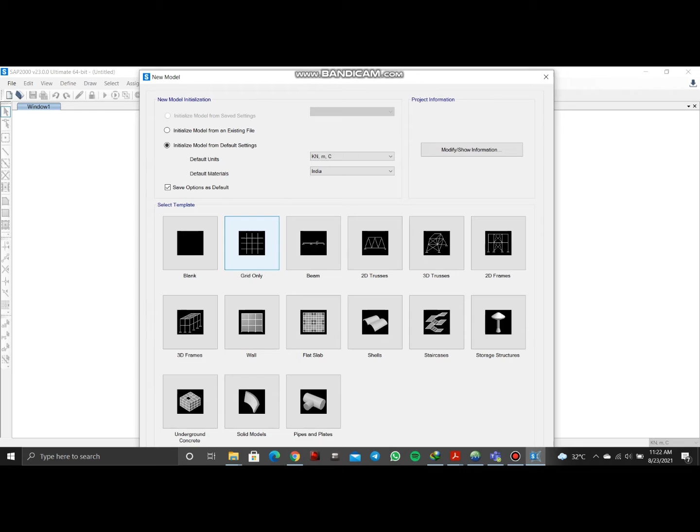I select grid only. Here we can choose number of grid lines in the Y direction and any other direction.

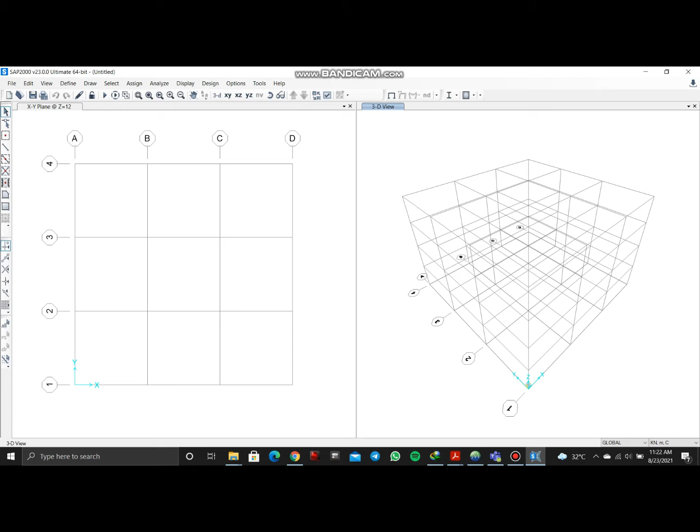There are two grid views. This one is for 2D view, another one is for 3D view. Here we can select XY view, XZ, and YZ. Normally we use this grid view for 3D view, but also we can use this as another 2D view. Like here we can see XY plane, here we can see XZ.

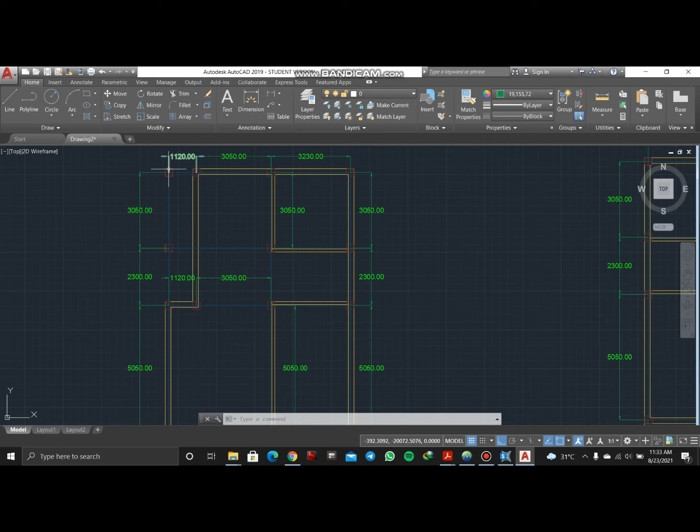So we have to select grid lines 4 from A, B, C, and D in X direction, and again we have to select 1, 2, 3, and 4 grid lines in the Y direction.

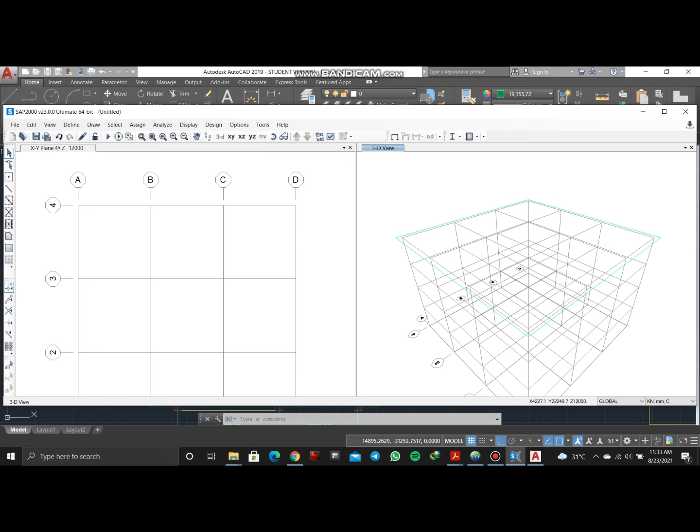So let's enter it in SAP 2000. Double click on the grid point, X direction. This is the center to center distance for 4170.

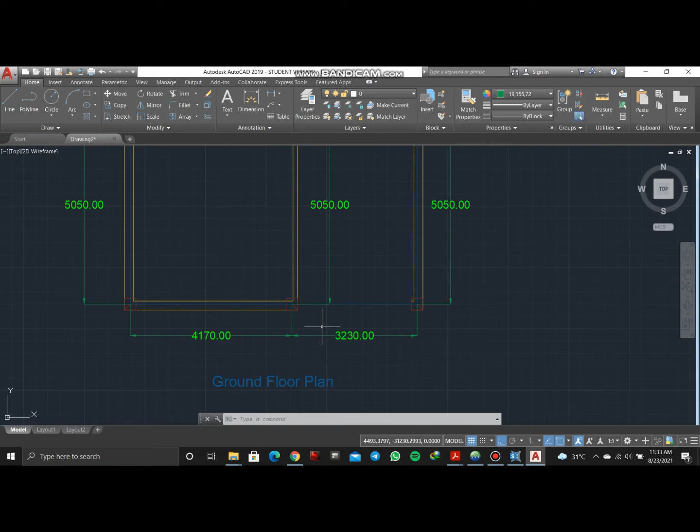Basic grid line is this one. We have to take 1120 as the first one.

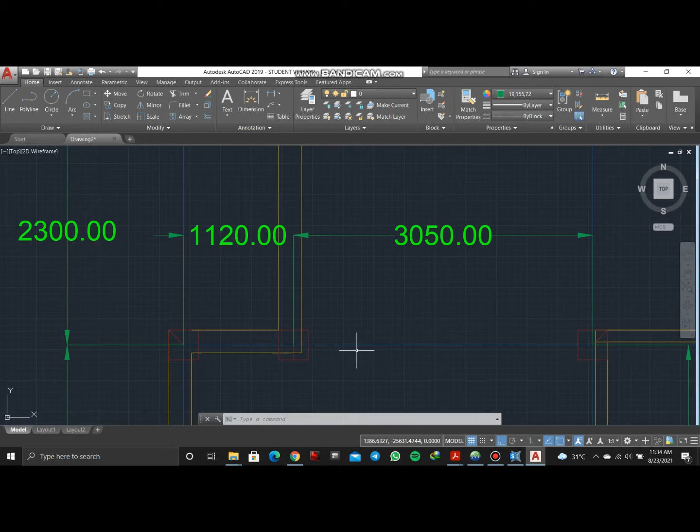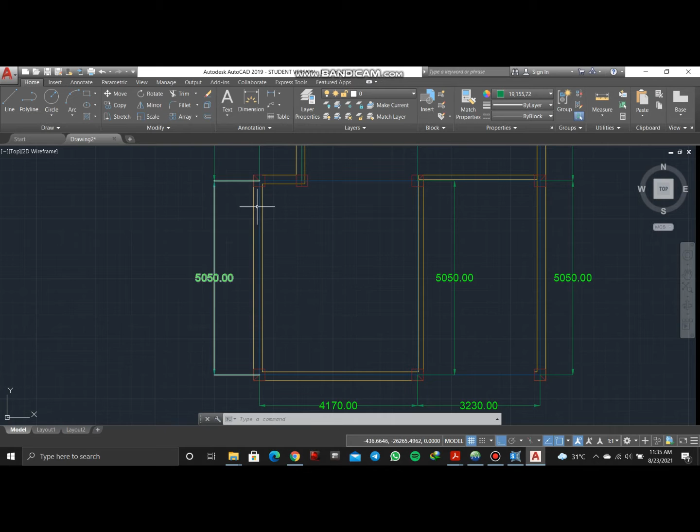So now Y grid data. This second grid line is from 5050 millimeters.

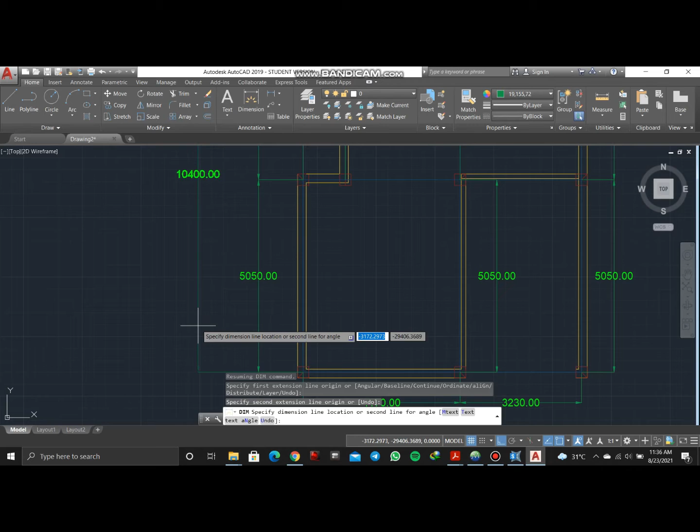Here in Z direction, the dimensions are selected from the floor to the surface of the upper floor. It is 2750.

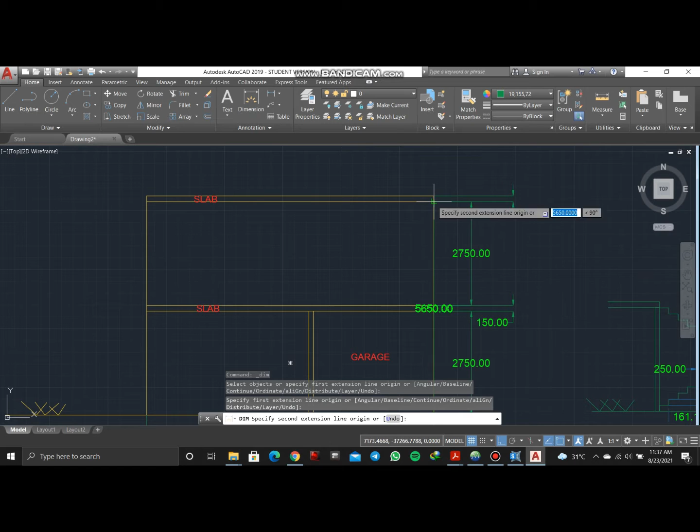We don't need these two grid lines, so we can delete them. Delete. So now we have defined the grid lines. So let's okay.

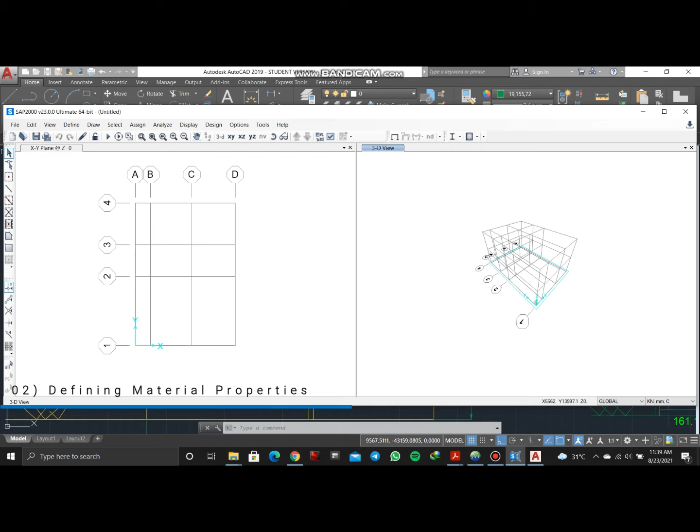Now we have to define the material properties. So we go define materials, and here we can select materials. So if you want, we can add new materials. Region India, standard India. Here I select M20 grade concrete.

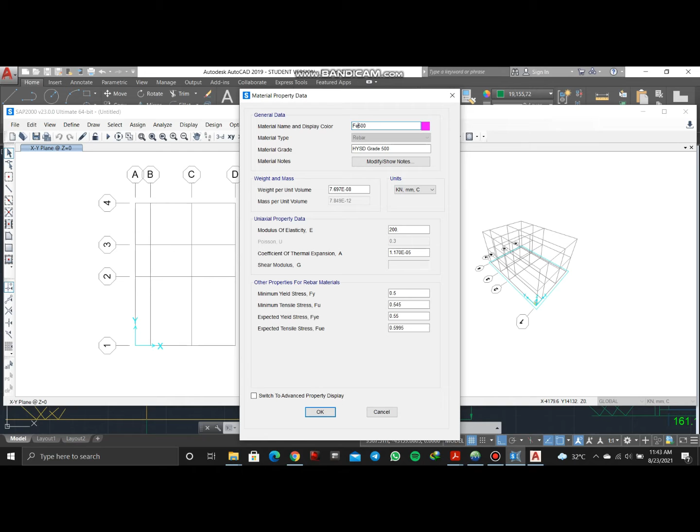Yeah, everything is okay. Now we have to define rebars. Here I select rebar Fe500. Okay, and let's modify it. Now it's Fe500. Okay.

Next we have to define section properties. For that we go to section properties. Here we can select define frame, tendon, cable, and area sections. First I am going to define a beam.

Here we select concrete, then rectangle. We rename this as beam, and the dimensions are selected for beam. This depth is 300 millimeter, and width is 230.

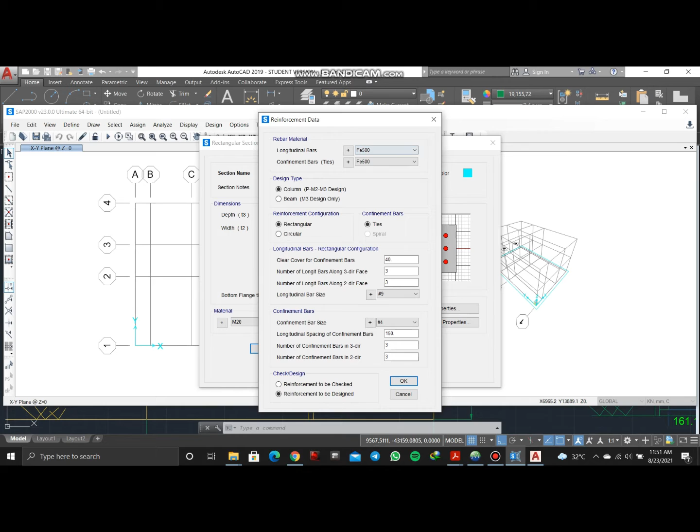The material selected is M20 for concrete, reinforcement material is Fe500. We have to select beam. Concrete cover I selected is, sorry, 25 mm in both sides. Okay.

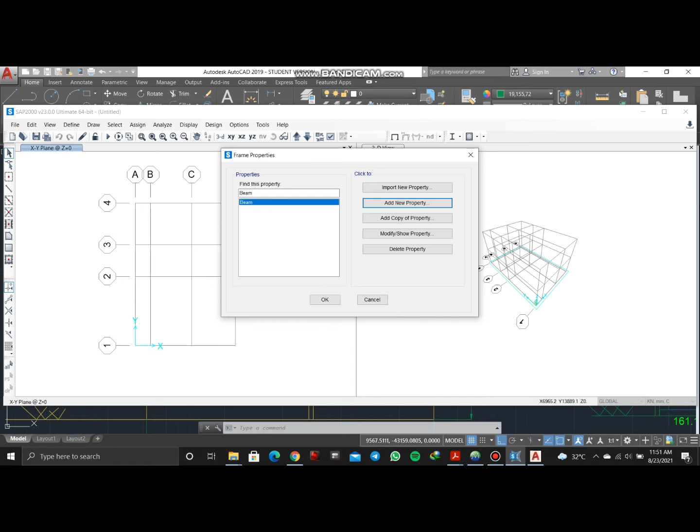Next, I'm going to define column. Dimension of the column is 300 into 300. Material I have selected is M20.

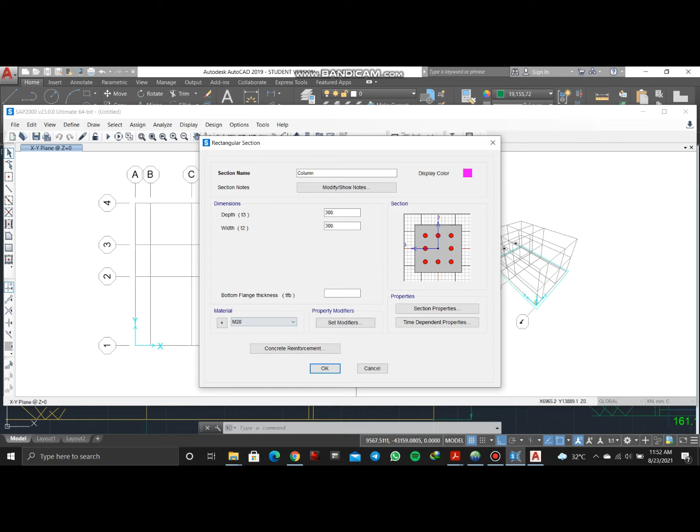Now we define slab. Here I got to define section properties in area sections. Here I add new section, slab. The slab is 150 mm. Material selected is M20. Okay.

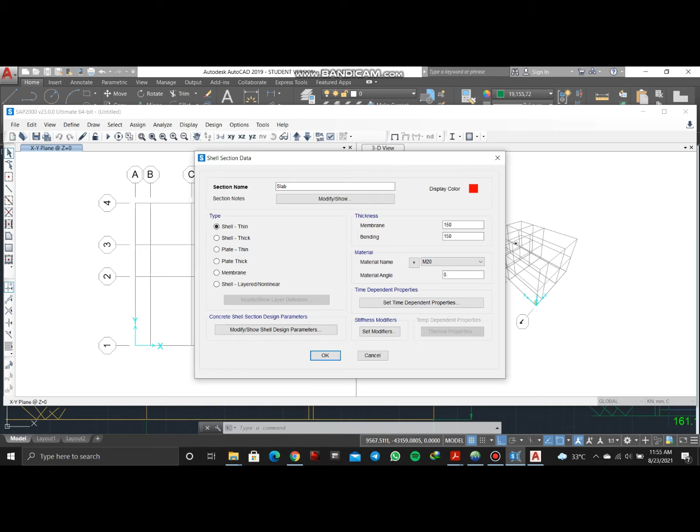Now all section properties are defined. So next we have to draw the building.

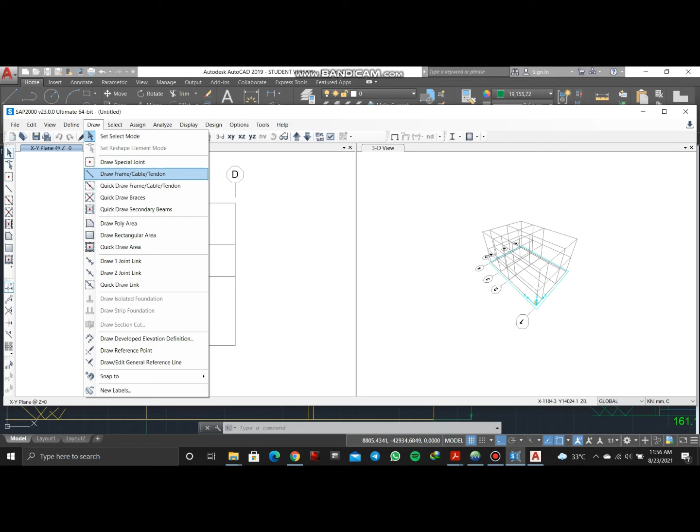Now we can model the building. I select draw frame, cable, and tendon. Here this is the XY plane. You can see in this floor there are no columns running.

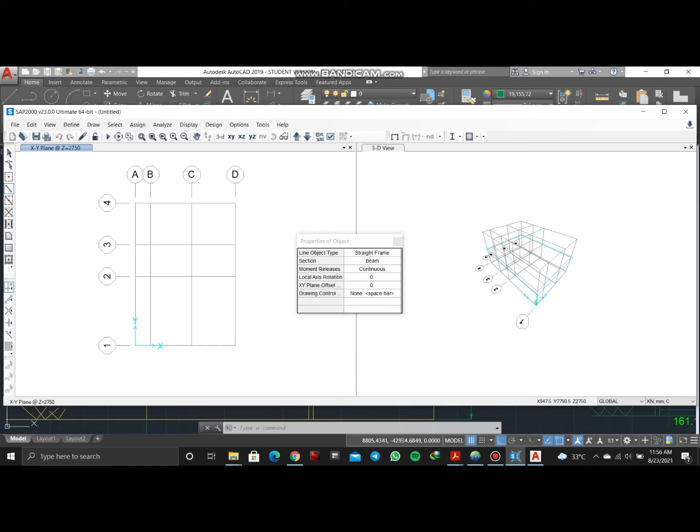So we go to the first floor. We select beam. Likewise, we have to draw beams for the second floor also.

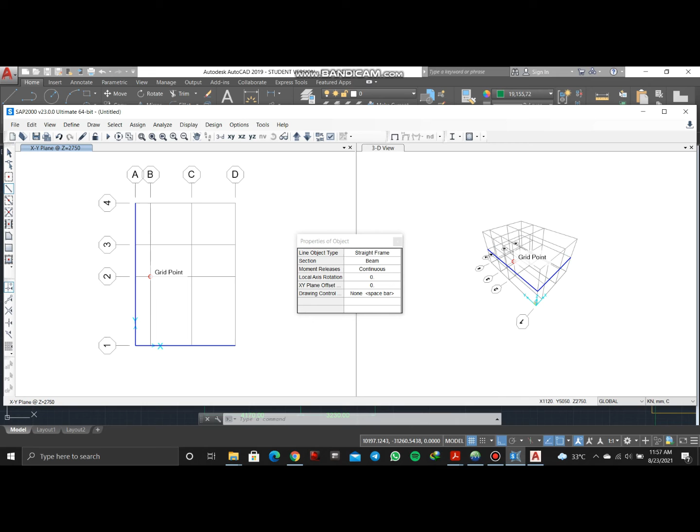I have selected the XZ plane, so now we can draw columns.

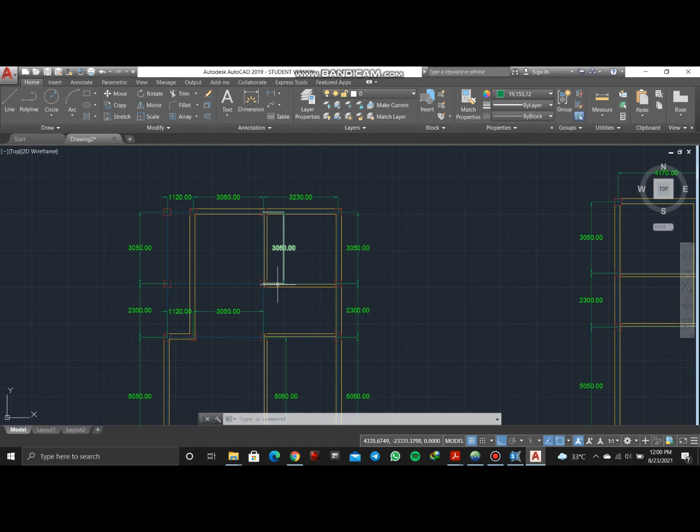In this ground floor plan, there are one, two, three columns here. In the first grid, then one, two, three, four grids are in the second grid, and again three in the third grid, four in the fourth grid. Let's draw.

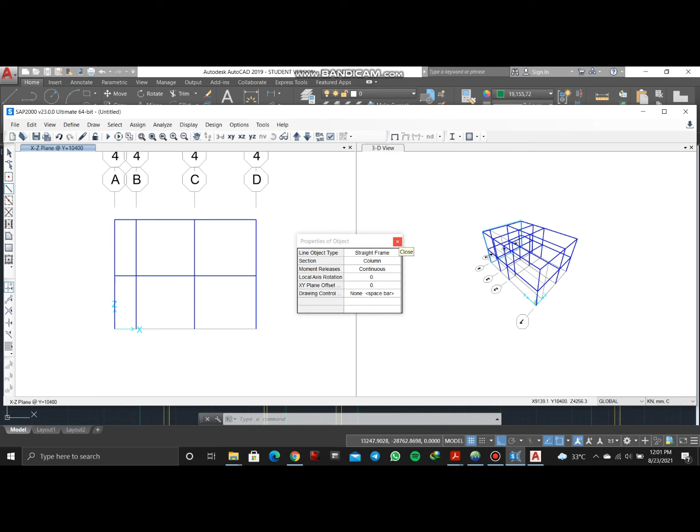Now I have completed drawing columns and beams. Now what's left is to draw the slab. I go for the XY plane. Here you can select one of these to draw slabs. Since all of these are rectangular slabs, I select the rectangle area option, and select slab.

Now we are in the first floor. Here in the first floor, there are one, two, three, four, and five slabs.

First floor slab is completed. Now let's go to the second floor. The second floor is completely covered in slabs.

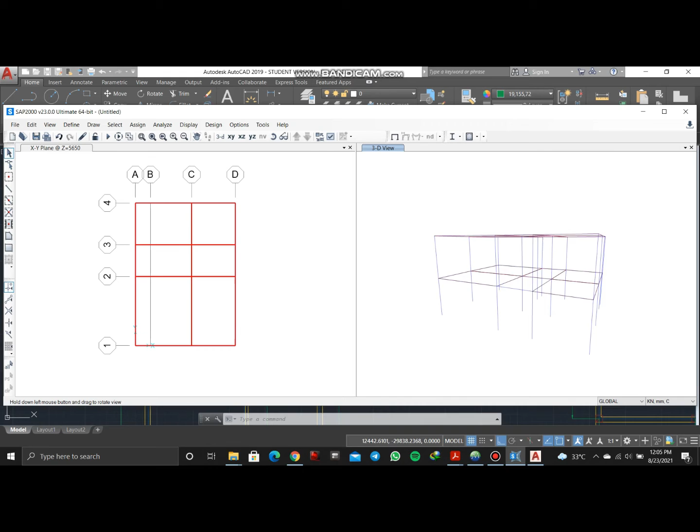After modeling, we have to fix this structure to the ground. First, we have to go to the ground floor, then select all. Then we go to assign, joint, restraints. Then we select fixed. Now the building is fixed to the ground.

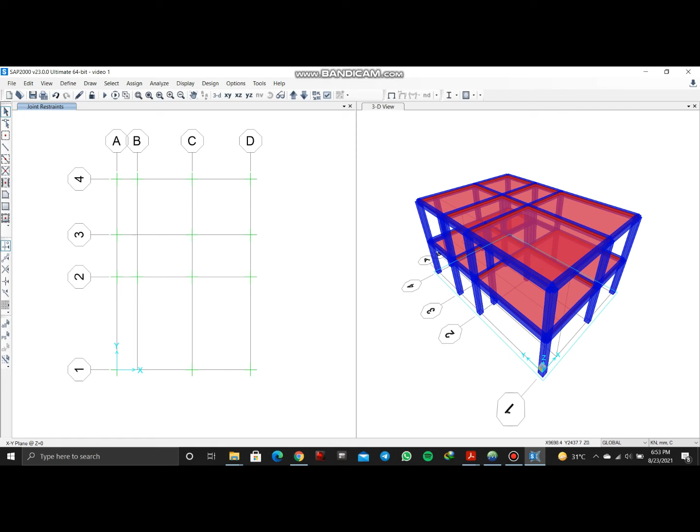After that, we have to define the loads. So we go to define load patterns. Here, dead load is already defined, and the self weight multiplier is one, which means the software is automatically calculating the dead load.

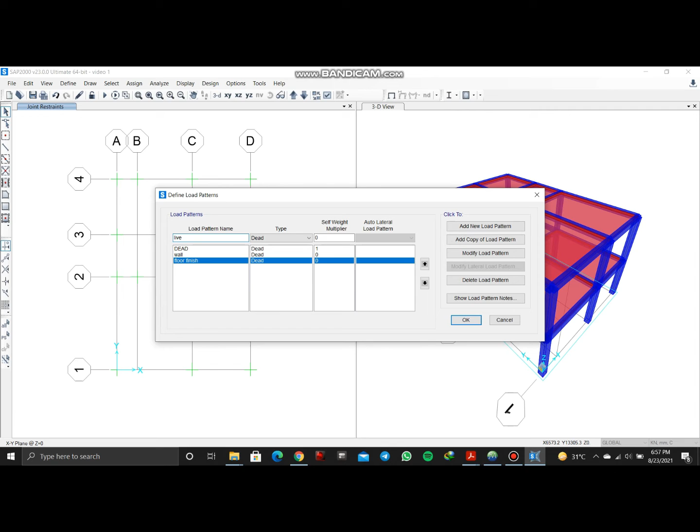We have to define the other loads which we apply manually. So wall load is type dead, with multiplier 0, meaning we have to apply it manually. Live load, this type is also live.

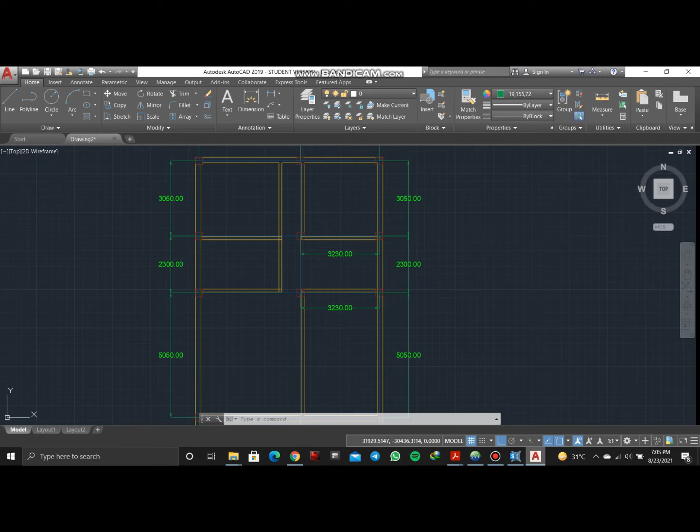Only in this beam there's no wall running. So we assign frame loads distributed, and here we can add the wall load. It's wall load, and load direction gravity.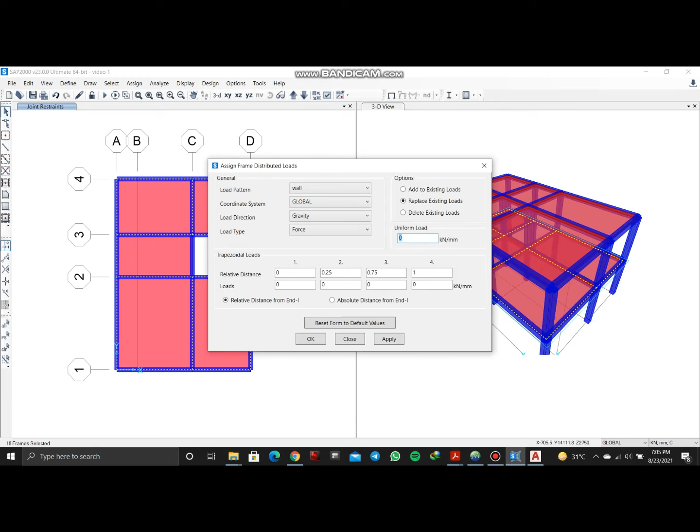Now we have the uniform load. Here we select unit weight of brick as 19.2, wall thickness as 0.23, and 2.75 is the height of the brick wall. So the input load equals 12.144 kilonewton per meter.

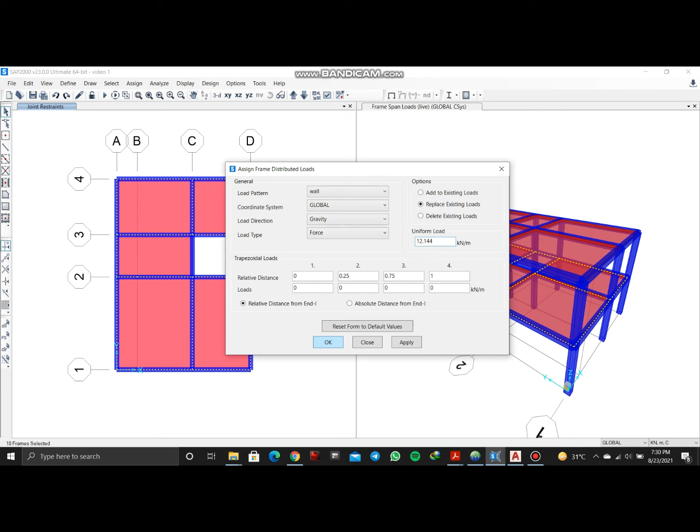By selecting display, object load assigns, frame, we select wall. Now it shows the applied wall load in the structure.

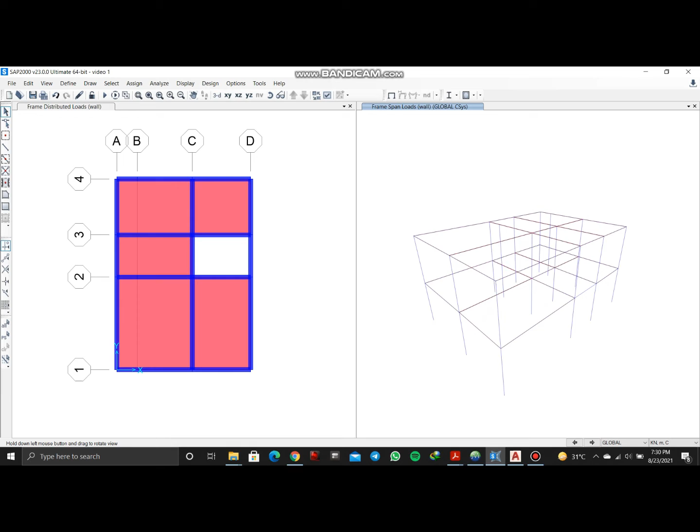Now we have to apply the floor finish. For that we select all the slabs in this structure. If we go to select, there are various section properties, so here slab is here, and we select slab. Now all slabs are selected.

Then go to assign, area loads, uniform shell. Now we select floor finish, global, which is the uniform load here, and it's 1 kilonewton per meter square.

Now we have to add the partition load. So we go to previous selection, except the roof slab. All the other slabs are applied with the partition load.

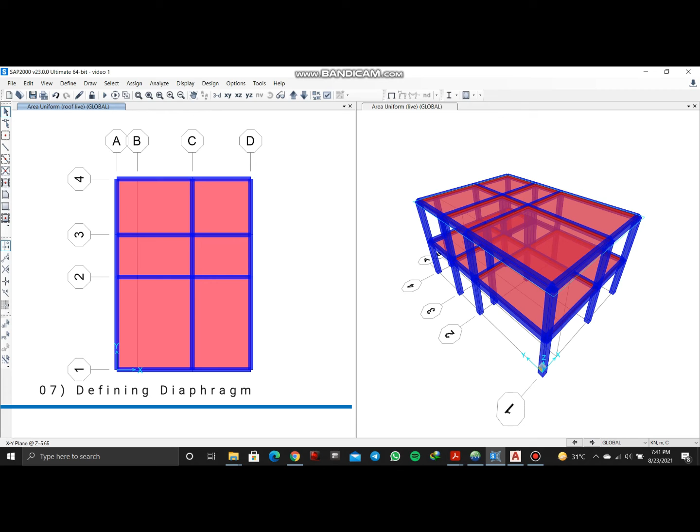Now all these slabs, beams and columns have to coordinate accordingly, so we have to fix them. Next we have to define the diaphragm.

First we select this slab, this whole floor. Then we go to assign, joint constraints. Here define joint constraints, this is a diaphragm, this is diaphragm one.

There are two floors, so select it. We add another diaphragm two. So this one is diaphragm two. Apply.

Then we go to the first floor, select everything on that floor, and click on type one. Then apply. Now we have to define mass source.

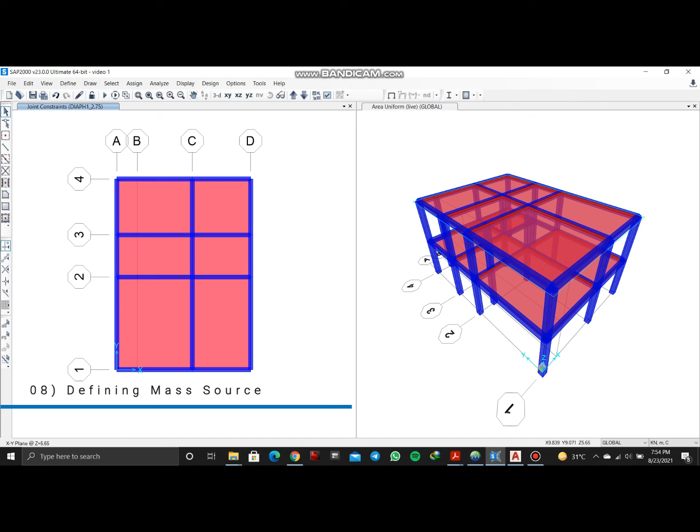For that we go to define mass source, add new mass source. Here we select specified load patterns only, with dead load one.

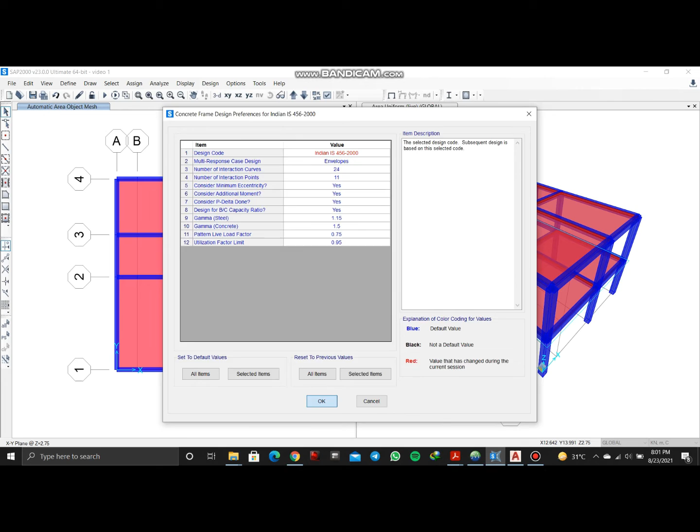Now we have to define load combinations. We go to define load combinations, click add default design combos, and select concrete frame design.

Here there are 13 combinations. The first one we ignore, from second one onwards there are 13. For each and every one we are going to rename them because we have to apply these loads, so first we have to define and rename them like this.

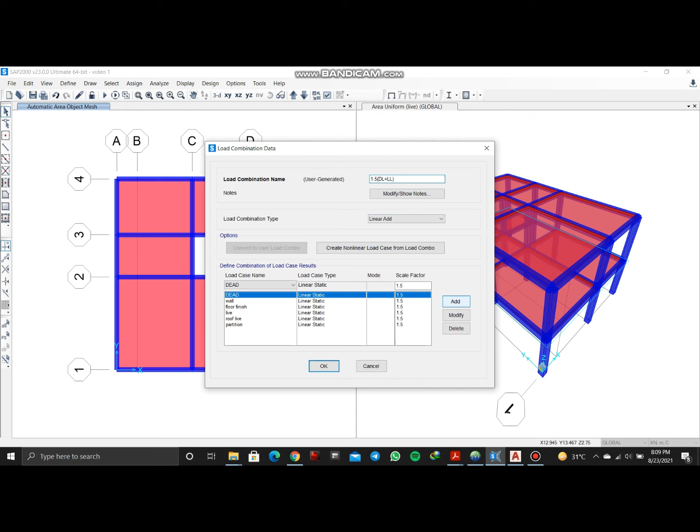Here the scale factor is 1.5. So we rename this like this, and we rename all of them. Now we have completed defining load combinations.

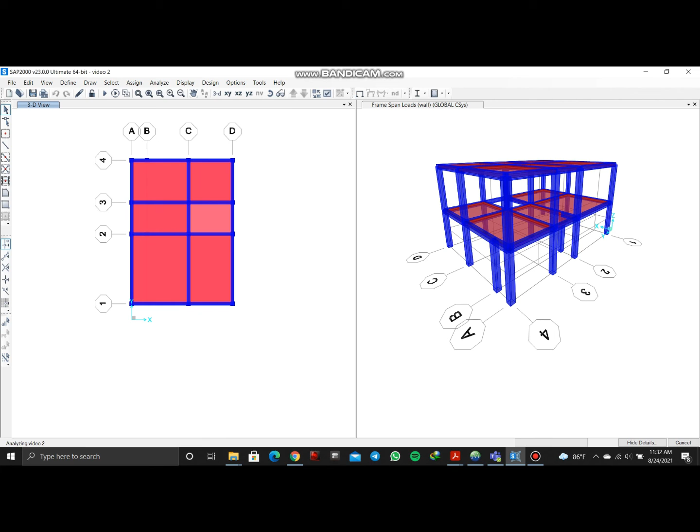Now we have to analyze the structure. So we can press this button, run analysis, and now it will show the deformed shape. Here we can click start animation.

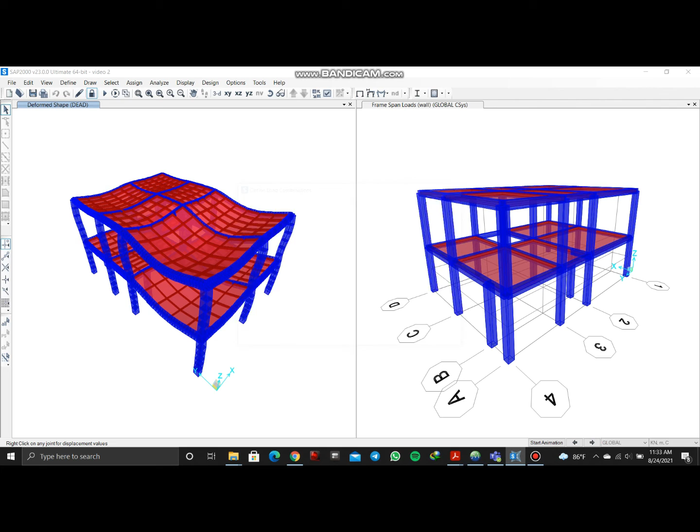There are various types of loads acting on this structure. So to know the shear force diagram and moment diagram, first we have to define the load combination. We go to define load combinations, where we have to take a combination of all these loads. So we go to add new combo.

Here we select envelope, we type envelope, and we select envelope here. Then we have to add these loads one by one, and select this one. Combination add.

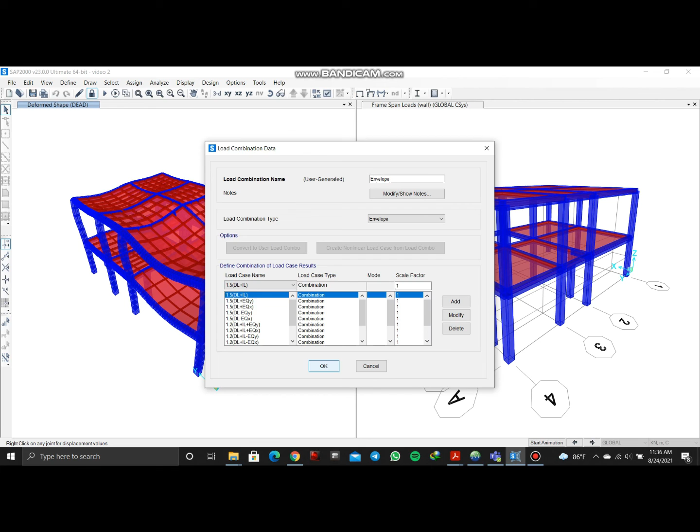Next we have to see the shear diagrams and moment diagrams. So we go here, start design check of structure.

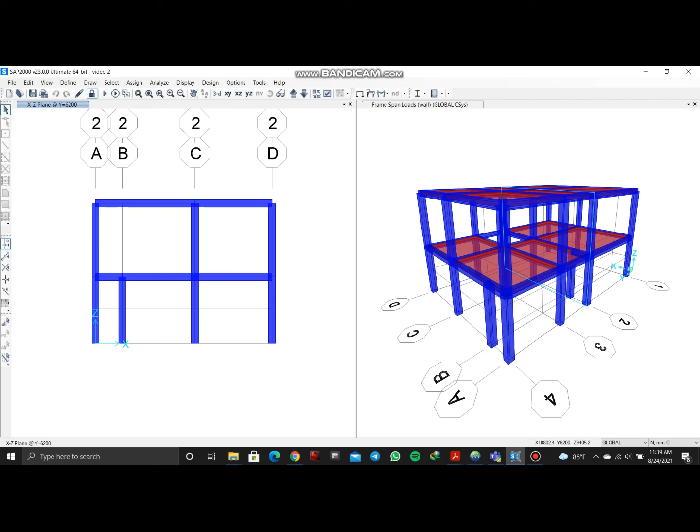Now to see the shear diagram and moment diagram, we just go here. We click show forces stresses, then frames cables tendons, then we have to select envelope. Here we select envelope.

Now we can see the shear force and moment diagrams. We just click here, right click.

Here it shows the maximum shear forces and minimum shear forces, maximum moment and minimum moment. Also we can scroll this and we can see moment and shear forces at that particular place.

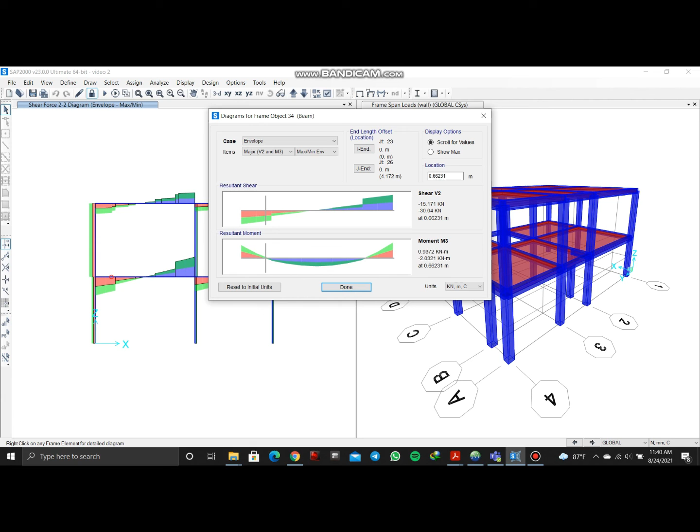Next we have to see how much reinforcement we have to provide. So here we can go to design concrete frame structure and let's start design check of structure.

Here we design in Newton, millimeter and centigrade. Here it shows the amount of steel we should provide. Here it's 1129, that means in mm square. That's the amount of steel we have to provide.

Now there are some checks to be performed to know whether our structure is safe or not. So we go to start concrete design, check of structure, then we select verify all members passed. Here it says all concrete frames pass the stress capacity check.

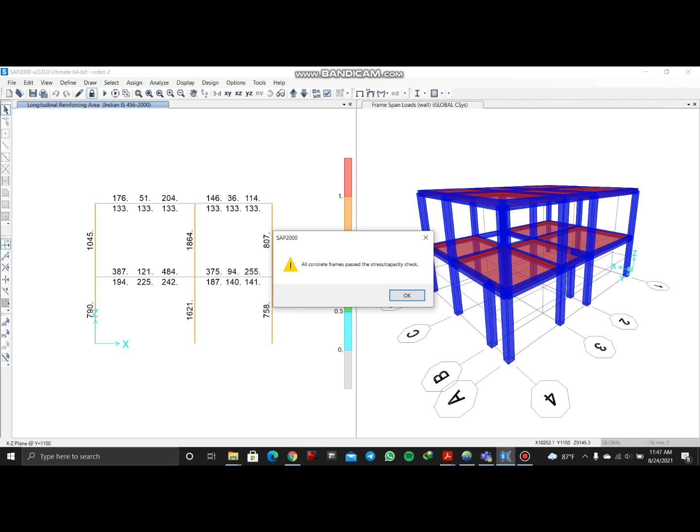So that's just one check, and we have to perform some other checks also. Here we can select display design info, and from this we can select longitudinal reinforcement, rebar percentage. So let's select rebar percentage. Now it shows the percentage of steel we have to provide to make this structure stable.

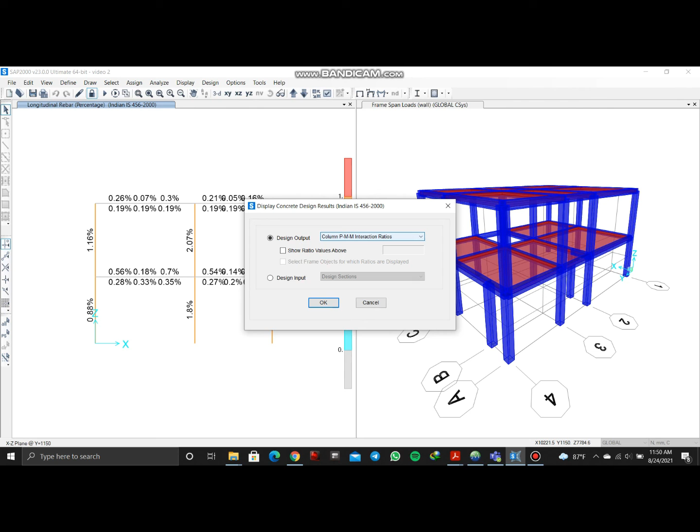Next we go to display design info again. Here we select PMM interaction ratios. P here means axial load, and M means moment in x direction and moment in y direction. Here it shows all the columns in orange color, that means it's okay. If it's red, that means the structure fails.

Here all the columns are in orange, so that means the structure is safe. Next we go again to display design info, and now we go to beam column capacity ratios.

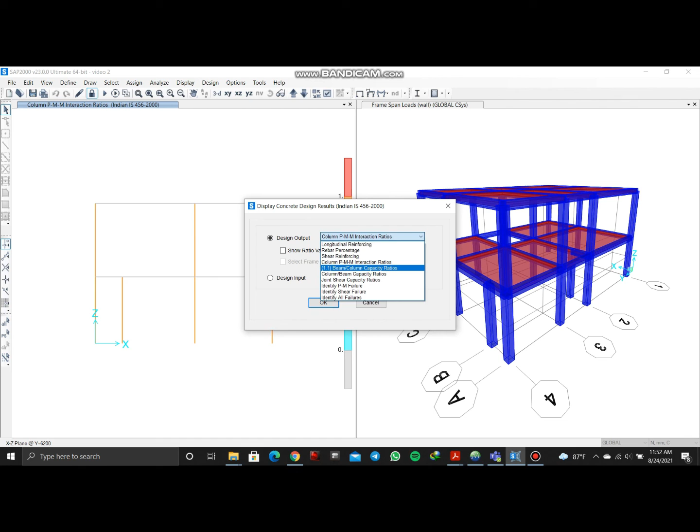Here, always the column must be stronger than the beam. So in these ratios, always the beam column ratio must be lesser than 1. Here all the values are lesser than 1, so the structure is safe in this check also.